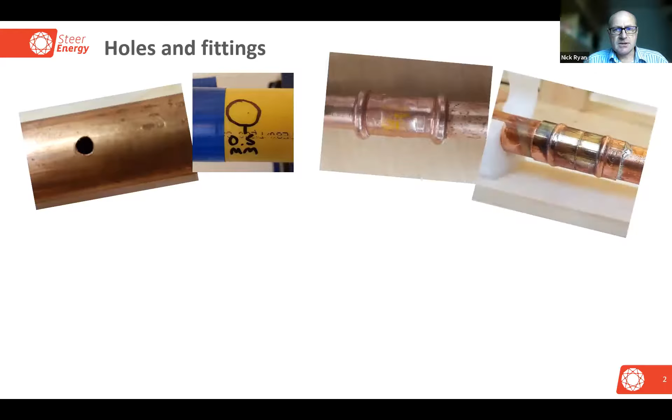These involved holes and leaking fittings. This fitting on the left is a crimp fitting that's not been done properly. We've done solder fittings that don't have any solder in them, and even legacy items such as this copper sweated into a lead joint, and things like compression fittings that have not been done up correctly.

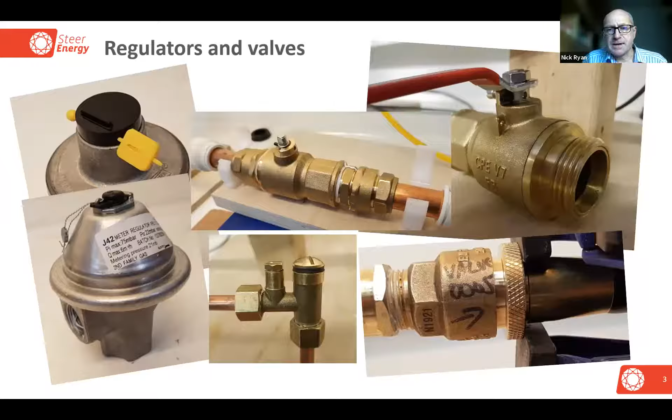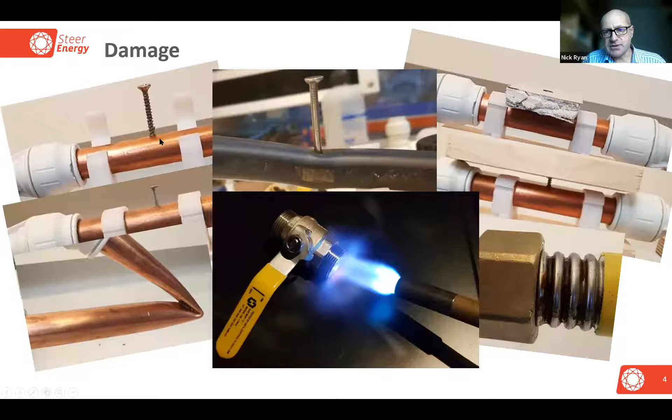So it's a very high level look at the results. What we found: a system that does not leak in methane will not leak in hydrogen. So when we say leaking, this is relative to the leak tightness tests carried out for the relevant standards—an appreciable or measurable leak using the standard equipment a gas fitter would have.

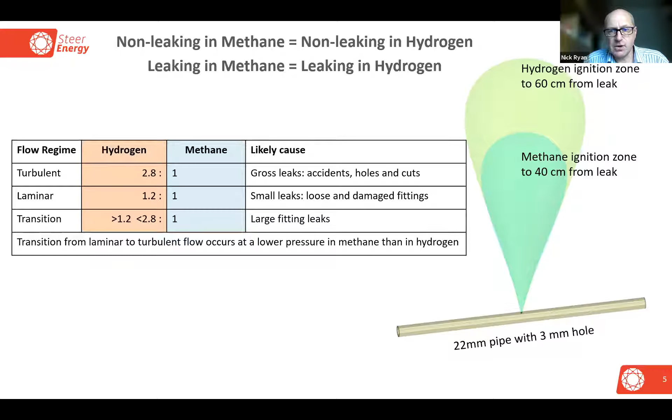So we looked a little deeper into why, because anecdotally at the start of the work we were told hydrogen's a very small molecule, that's what you'll hear people say, hydrogen's very leaky. Actually, the size of the hydrogen molecule, it's 2 hydrogen atoms, 2 angstroms essentially, well 1.8. The methane molecule, you've got a carbon atom with 4 hydrogen atoms, that's 3 angstrom side length. So they are essentially the same order of magnitude of size, and there's no reason to expect that one would leak more than another.

Also the size of leaks, the smallest leak you'll measure using conventional leak testing equipment is about 0.1 millimeter, that's 10 to the minus 4 meters. These molecules are 10 to the minus 10, so we're talking 100,000 to 300,000 molecules side by side to pass through that leak. So really, there's no molecular reason why we should see one leaking more than the other. It is essentially these bulk properties of density and viscosity that mean hydrogen will leak a little bit more.

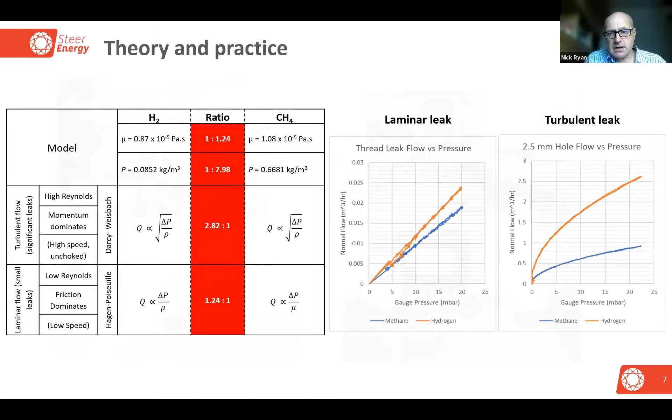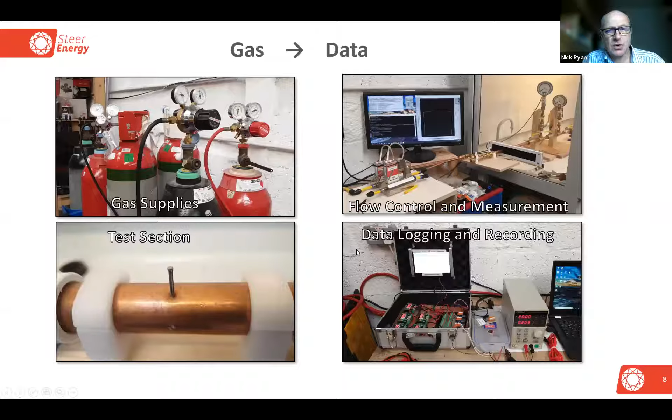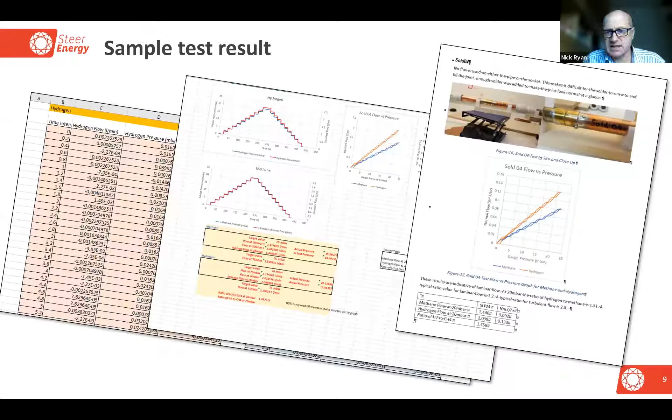For the sample, for each test, and again we were testing hundreds of different fittings and damaged sections, we'd step the pressure up and measure the pressure from flow. We do that in hydrogen, we do that in methane. For anything like a valve, we do not touch the system in between, so it is the same system, or close to the same system, that we're testing, bearing in mind there will be pressure variations in the atmosphere and temperature variation. Those are logged and addressed.

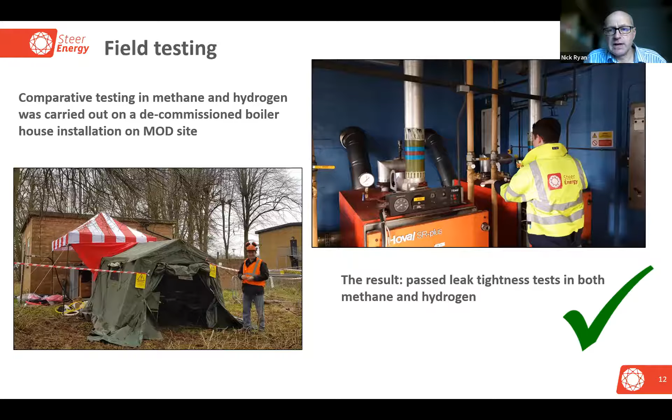But the other thing was it was incredibly difficult to test the same system twice, because to remove one gas and replace it with another, you had to break the system. We had to open up vent ports, we had to cycle valves to test whether the valves were passing. So you can never really test the same system twice, but essentially it was a good system in both gases, and would certainly have passed leak tests.

One other thing we looked at was a variation to look at purging - this is the process by which we commission a system. It starts off in air and you would then transfer into fuel gas. Now the density, these bulk properties of hydrogen - the fear is that hydrogen will stratify in a pipe, which we did not see happening and have not seen happening yet. It would tend to rise to the top of a pipe.

But when we purge - now these purges have been carried out at much slower speeds than would be recommended in standards, because we're essentially trying to experiment to see where the purge system stops working. We start getting this situation where hydrogen will bypass or methane will bypass the air. And really, we did not see that happening.

In fact, if we look at this one, this is controlled by a 2mm nozzle here. The hydrogen in blue, the methane in orange with the tick marks. And what we actually see is the hydrogen actually purges better than methane.

Now part of that is the faster flow speed - as hydrogen starts to go through the system, this is being controlled by a purge nozzle, so we know that hydrogen will flow more freely out of the nozzle, out of the hole, so then the speed increases and we get a better purge like that. Also, I think the increased coefficient of diffusion helps as well - hydrogen wants to mix with the air more, so we don't get those pockets left behind. So that sort of summarizes where we got to.

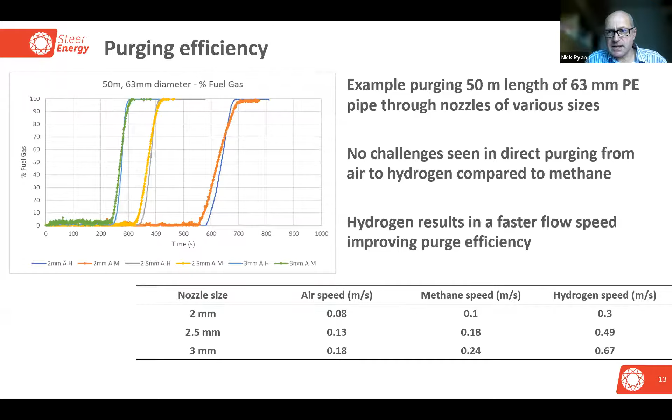I think it's probably worthwhile just going back to that summary of results slide there, which I know will lead on to some of the other work. And really, we did see more leakage in hydrogen, but it does follow the theory. You would expect 2.8 times the leakage in hydrogen compared to methane for larger leaks, and 1.2 times for smaller leaks. So there will be situations where a gas system is on the edge of passing a leak tightness test, and it just passes in methane but will not pass in hydrogen - it will fail in hydrogen. So if those same leak test criteria are used, the hydrogen systems will be more safe.

I would say, though, those sort of systems that are on the edge are likely to be detected through smell, because the odorization will detect really, really small leaks, as long as it's not in a well-ventilated area. And if it is in a well-ventilated area, then the risk is a lot lower as well.

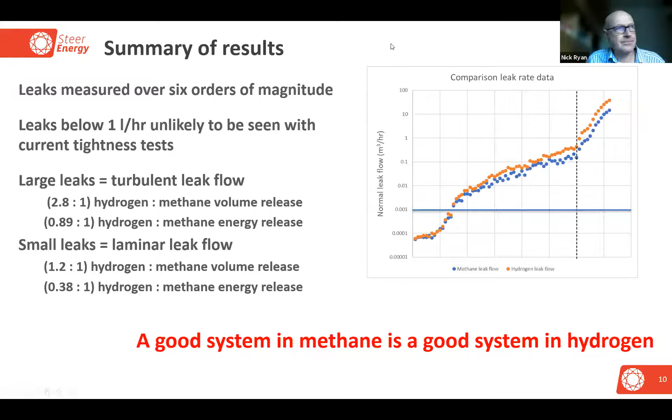Thanks, Nick. Very helpful. We're now going to move on from leaks in pipes in controlled circumstances to a more real-world view of what causes those leaks, how frequently they happen, and what scale they occur at. That's based on some real data, so a nice comparison there. Over to Paul then.

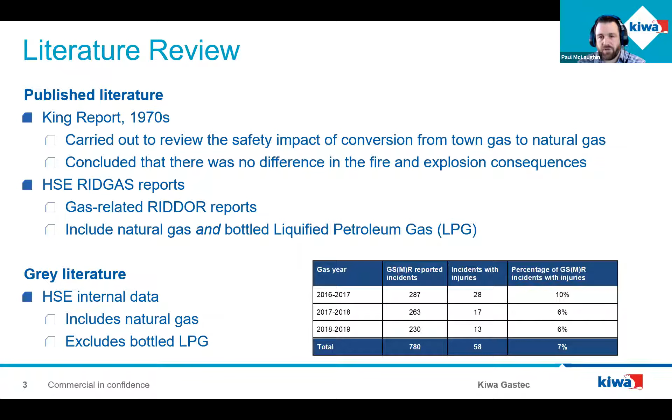So where are the knowledge gaps? What do we actually need to know to understand what's happening? First off, we need to have details of the RIDDOR events beyond the one-line summary of what's in there. As you can imagine, when people are responding to gas emergencies, their top priority is not filling out the description there, it's making the system safe and so on. So we need to try and get a bit more detail if possible.

And then also the question, what happens when there are gas escapes which don't cause a RIDDOR reportable event? So if you've got a leaking gas pipe that's got a sense that you can smell gas, but it's not building up to dangerous levels, then that's not going to be RIDDOR reportable, but obviously it is still an escape which is happening. So the scale and the magnitude of these things, again, is worth getting to understand here.

So there are about 24 million gas meters across the UK now. And from those 24 million, there's about 400,000 incidents and calls that people have to respond to per year, which is a large number in itself. But if you look at it there, essentially it's saying that about 1 in every 60 years per meter point, there's going to be an incident that's responded to.

And then from those 400,000 down to 260 is several orders of magnitude reduction. So the people do respond and investigate these incidents and make them safe in the vast majority of times. So it's understanding what is happening along those steps that's leading to the risk reduction.

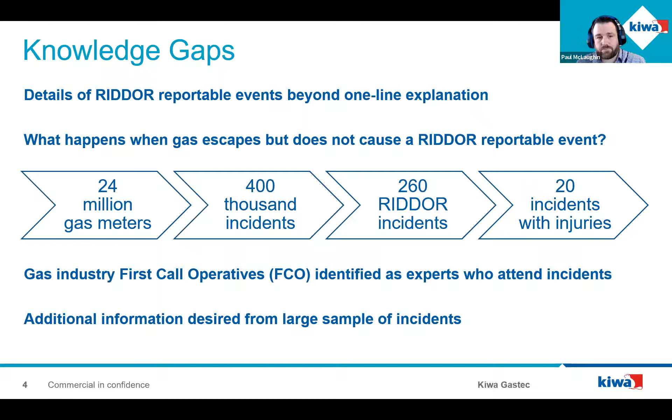This shows then how we sort of set out to look at it. So essentially 4 steps from designing the experiment of finding out what we wanted to have. So looking at a series of questions that we could ask the FCOs to respond to during an incident, which wasn't going to impact on their timeliness. And that's really an important factor there, is if we're going to ask people for data, it's got to be something they can answer simply.

It's got to be something that's in a black and white straight area if possible, rather than free text, because that's very difficult to process automatically. And then looking at the sample size. So we've set out ourselves that, obviously we'd have liked to get as many as possible, but we set a target of about 1,000 incidents that we wanted to have looked at as a minimum.

So we developed this. We developed an app that they could pretty easily use to fill the data in, so there was no data entry, transfer from paper, etc. This then was deployed, so the FCOs were trained in their depots to make sure that they knew what to do. They weren't asking people to go out and use the system they weren't familiar with and run the risk that they didn't know what to enter on it.

And started with one area before rolling out to 2 other locations, and importantly, rolling out across the country. So it wasn't just finding out about gas incidents within one particular geographic area, which might have some sort of local foible to it. So this was carried out over a period of a few months with regular updates, with a dashboard of results.

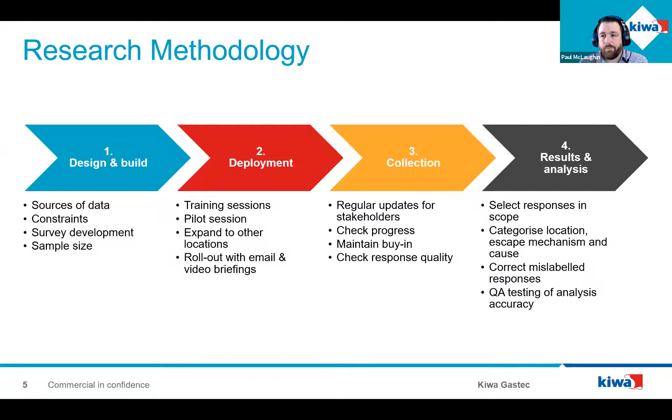So all of this essentially was there were 1,300 call outs. Of those, about 1,100 were gas escapes, and as we'll mention later on, of those gas escapes about 900 were within the scope of Hy4Heat, because again, reiterating the point mentioned before, this is looking at things after gas meters essentially.

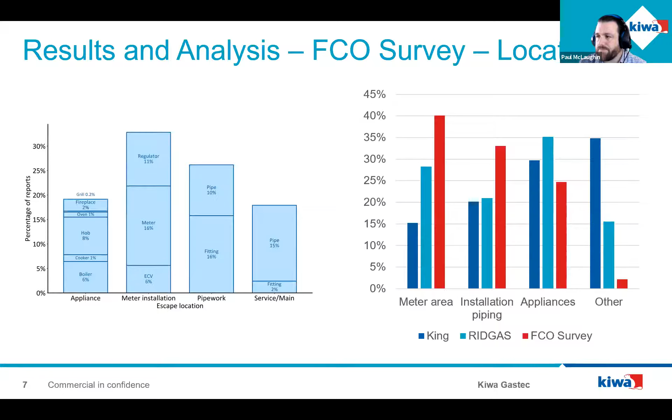What we did with this was we took these data points and attributed a leak rate that was consistent with the data which Steer Energy had carried out. So looking at a dry joint, what kind of leak rates you might expect to have from that, the holes that you would have in there, what the leak rates were. And in many cases, especially the larger holes, these match up just exactly as you'd expect from theory. There's nothing in there which is going to give you unusual fluid mechanical properties.

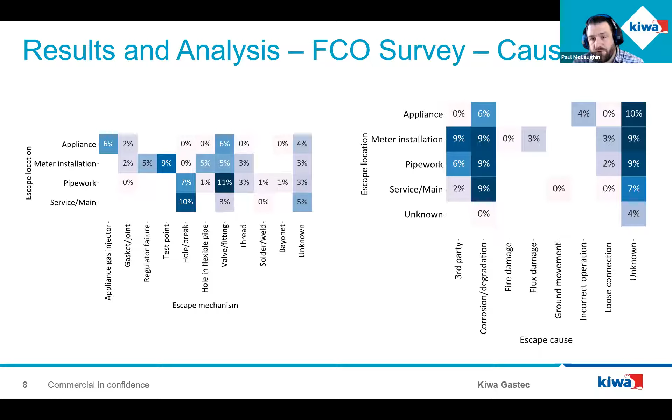Increasing rates. And of course, as we mentioned before, hydrogen is always going to have a higher release rate volumetrically than natural gas, with the larger difference at large rates where you're turbulent. But the energy release rate is lower or comparable with hydrogen compared to natural gas when you look at energy rates.

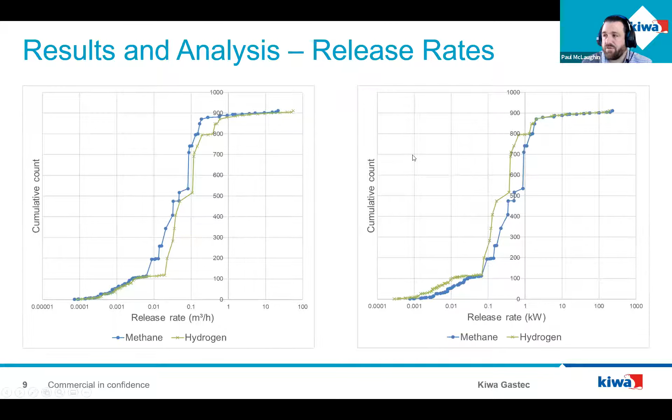So what do we actually conclude from this? Well, the conclusion is a set of S curves and data that we are able to use in building up the quantitative risk assessment, in terms of the types of, if there is a hole, what the release rate is going to be, and so on. The QRA is a section for discussion later on.

So of the 1,300 surveys we mentioned, about 900 were downstream of the emergency control valve, and thus in scope for Hy4Heat's work pack 7. Most escapes would have been below MPLR on natural gas, and some of them would have been above the MPLR on hydrogen. Although there's that difference, there's an increase there, because the MPLR is set at a low level, it wouldn't create a flammable atmosphere with either natural gas or hydrogen in those cases.

A small number of escapes, about 3% of them, would give rise to flammable atmospheres if you had either natural gas or hydrogen, and if you allowed them to continue indefinitely. That's the key as well, as when we're looking at this, is making sure that we understand what happens in terms of dispersion and times of response and so on.

Spontaneous large escapes are extremely uncommon. Pipes don't just disappear. Pipes don't suddenly develop a great big hole, certainly not with the temperatures, pressures and materials that we have in gas systems used today.

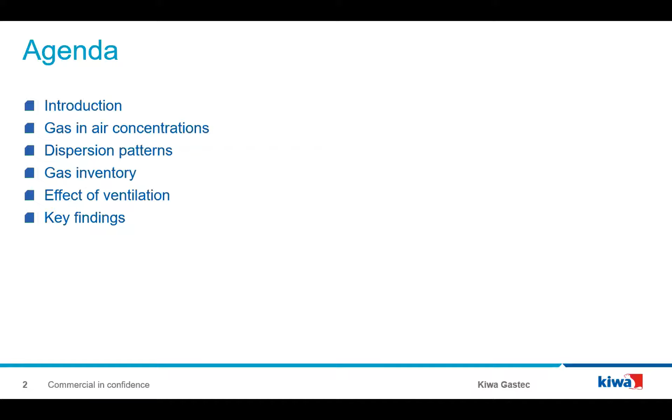I'm going to be looking at an overview of gas and air concentrations that are reached after a leak, the pattern of dispersion of both hydrogen and methane in a domestic setting, the gas inventory that you get after this, the effect of ventilation on these concentrations, and then a summary of the key findings of this work.

So the primary risk from any flammable gas ignition is an ignition of a gas and air mixture, and this applies to both hydrogen and methane. Studies have shown that the greatest risk of damaging deflagration tends to correlate with higher concentrations, and particularly near stoichiometric concentrations of both hydrogen and methane.

So if we are to understand the risk associated with using hydrogen in a domestic environment, it's important to understand how it actually moves around a property if it does leak, how high these concentrations may get, and most importantly how this compares to the situation we've got at the moment with natural gas, because we do have a flammable gas being piped into our homes.

I should just mention that this focuses on the dispersion of gas. It doesn't consider the consequences of ignition, and that is discussed later, in some of the presentations following later this morning.

The previous presentations have detailed that gas leaks are rare, and certainly the majority of gas escapes within a domestic setting are small. However, if you do get a larger gas escape, this can lead to a risk, and this is what we want to try and understand.

So data from several experimental studies have been looked at, including Hy4Heat and H100. We've used the data collected under these studies to understand the pattern of gas dispersion following a gas escape in a domestic environment, the impact of the escape location on dispersion patterns and the gas in air seen in that environment, potential areas of gas accumulation—this links potentially to meters mentioned earlier in terms of a leak from a meter in a cupboard—and the impact of ventilation on these, including house properties as well as additional ventilation within the space.

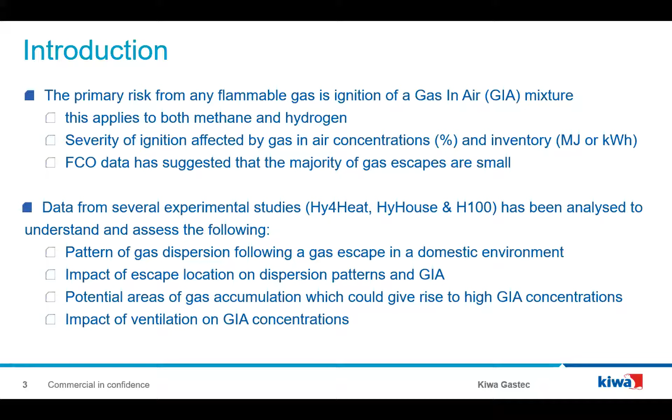So most of the experimental data was collected from two properties: the first collected by Kiwa under the HyHouse project, and the second collected by DNV GL under the Hy4Heat program. One is an old cottage, on the left-hand side, in Scotland, in a deserted area, built in the 1800s of solid stone, rendered. This was sealed up in terms of air tightness over the duration of the experiments to understand the impact of air permeability on the gas dispersion seen in that property, so we had a number of experiments repeated at different levels of air tightness.

The other property is a new build, built roughly in 2019. Both properties were fully unfurnished but finished, so they had second fix, but no furniture within them.

So gas was injected into these houses at known and controlled rates, dependent on the leak scenario being simulated. We were trying to simulate potentially common activities such as a leak in a fitting, a leak from a gas pipe, or maybe a DIY incident where you'd put a nail through a pipe or something like that.

But we also wanted to simulate larger leaks, such as perhaps a mains failure, so we had a wide range of leak rates into these properties.

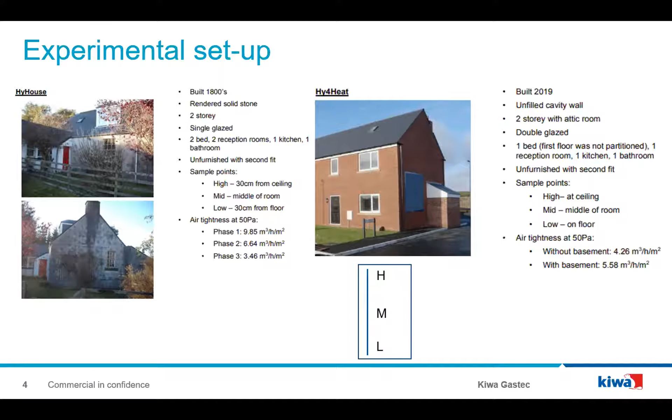In all instances, this maximum value was actually recorded at the ceiling, and we will touch on this a bit later on.

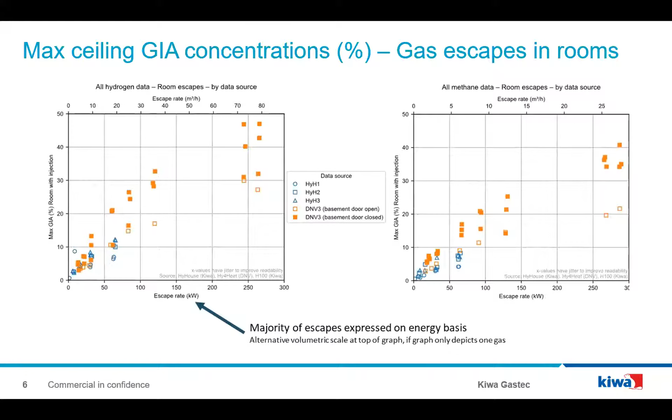So you can see HyHouse 1, 2, and 3 is basically changing air permeability of the property. As the property increases in air tightness, you tend to get slightly higher concentrations. Also looking at doors being opened or closed at the basement of the Hy4Heat project, that has an impact on the maximum concentration of gas you see within that space.

Now, I mentioned earlier that the maximum concentrations were seen at the top of the space, and so far we've only looked at the maximum concentrations measured in these experiments. One of the key findings was that when the gas was released at low pressure into a naturally ventilated space, both hydrogen and methane tend to stratify. This means you get the highest concentrations at the top of the room and comparably very low concentrations at low level. The height of gas release has a direct impact on this. The higher your leak, the higher concentration we tended to see at the top of the space.

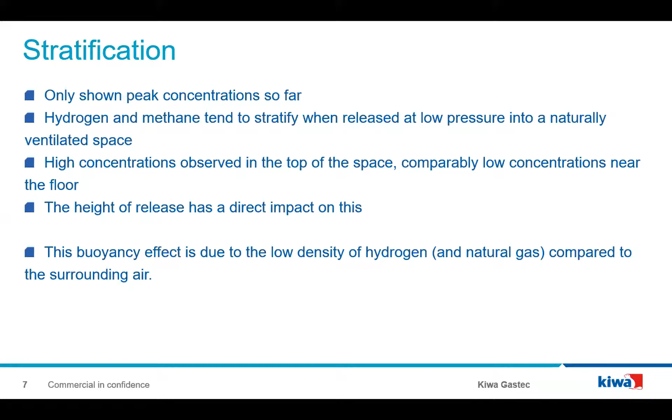This is all due to the buoyancy of the gas. Hydrogen is very light, so when released into air, it tends to rise. It will always rise to the highest space, and this creates a layering effect within a room. I've tried to demonstrate the stratification in these graphs.

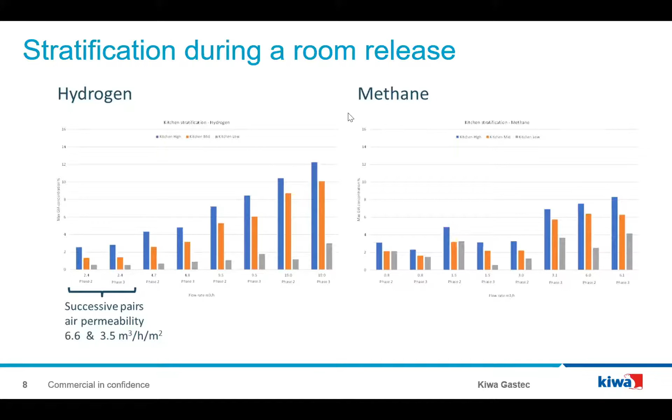So we're now moving on to look at gas inventory. This is part of the picture when considering the amount of energy and potential damage that could be caused in the event of an ignition. This will be talked about a bit more later, so I won't go into detail about that at the moment.

We used the maximum gas in air concentrations recorded in each test to work out the inventory in the properties. This was done on a whole property basis, but it can also be done for individual rooms and even taken down to individual cupboards, for example, to understand how much gas was in each enclosure we were measuring. In all of the test work we completed, methane actually resulted in higher gas inventories than hydrogen at the end of the test periods.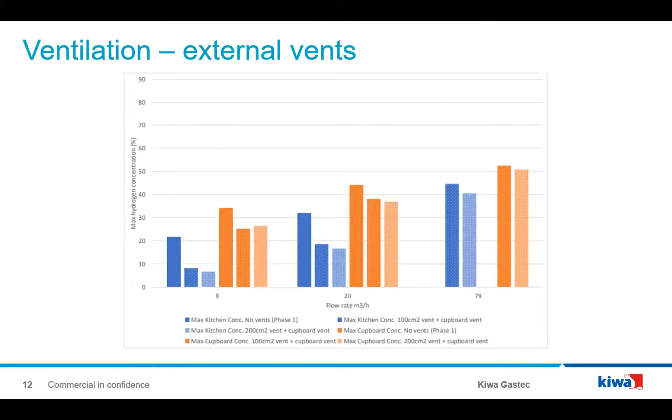So summarizing the key findings: fairly obviously, the higher release rate you get, the higher gas in air concentration you're likely to see within that space. You tend to get comparable maximum concentrations recorded for hydrogen and methane for the same energy release rate. The total house inventory at the end of the test period was lower when injecting hydrogen compared to methane. The height and location of gas has a marked effect on the maximum concentration observed in the space. Gas escapes in a cupboard can result in high concentrations, and basement releases can also result in high concentrations in inventory.

The air permeability of a property has a huge influence on the gas and air concentrations that you see, and adding to that, the effect of ventilation is strong - there is a strong effect of adding ventilation to a space in terms of taking gas concentrations down. And as mentioned by the two previous presenters, if you reduce the risk of increasing gas flow into a property, you can do that by adding an excess flow valve, which is an option for reducing risk, or the risk of large escapes occurring within a property.

From the presenters this morning, you've already heard about the likelihood of a leak occurring and the concentrations that build up when that happens. So I'd like to talk about - sorry, my slides have gone out of order a little bit - what actually happens should an ignition occur. The items we'll cover in the next 15 minutes or so: I'll give a little introduction to the work we did, explain the methodology, which was predominantly a literature review of existing data, extraction of data where we could, some processing, and then talk through some key findings, including isodamage curves, how consequence varied with concentration, obstruction and venting of the enclosure in which it took place.

As my colleague Georgina already said, the primary risk from any flammable gas is its ignition in air as a mixture, which applies to both methane and hydrogen. So we needed to understand the likelihood of a leak occurring, the type of concentration that would be achieved, and then see what would happen if those concentrations were ignited. That's what my presentation will deal with.

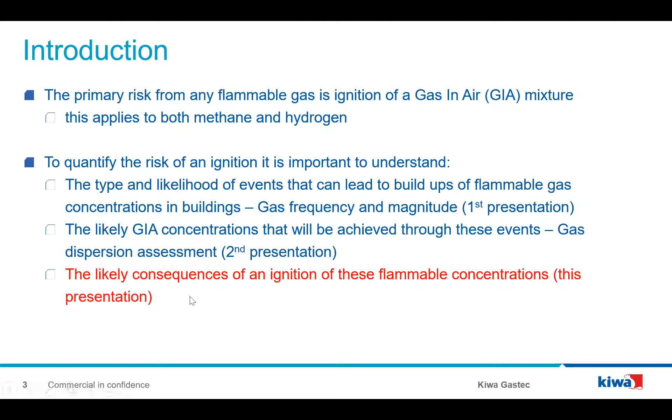So the first stage was to look at data that existed, and for obvious reasons, there's not a lot of data on real ignitions in domestic premises. So you have to look at what does exist. We looked at over 14 experimental studies that involved ignitions of gas within enclosures. These were from around the world: European studies, US studies, and Japanese studies, from a wide timeline from the early 1900s to present day.

We looked at academic reports, industry papers, from contacts we had, and various experimental studies. Each piece of paper or report was thoroughly reviewed. We summarized the findings, and assessed each one in its context and relevance to a domestic situation.

We extracted key data from each report and looked in detail at the context and the setup in which the experiment was carried out. What was it trying to achieve? We looked at the findings of the work and observations, and we paid particular attention to any evidence of detonation where it could be found.

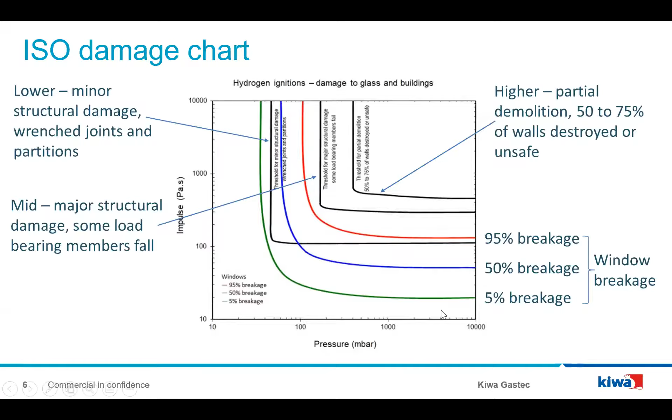We obviously had a lot of data, so we split the graphs down into concentration bands to allow ease of visualization, basically. And we chose bands that we thought - we had a feeling that initially hydrogen, from about 0 to 10%, would be less severe than methane in terms of consequence. There may be comparable damage from between 10 and 15%, and from 15% upwards, hydrogen is likely to be more severe. In which case, this is where we believe that preventative measures would have to be put into place to avoid these sort of concentrations.

It should be stressed that the sort of consequences that would arise from the above bands are very subjective. They're subjective to experimental conditions and may vary. So we plotted isodamage curves for each such band.

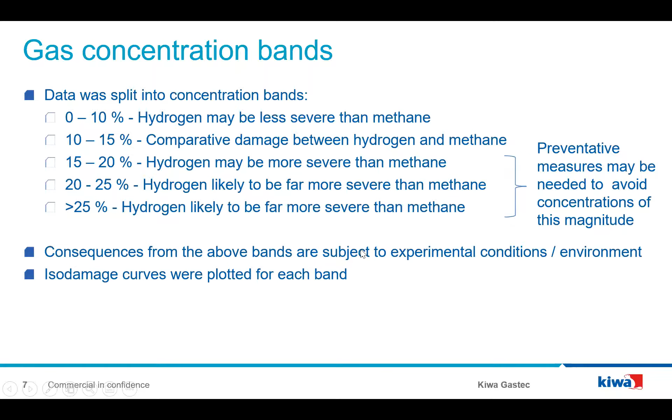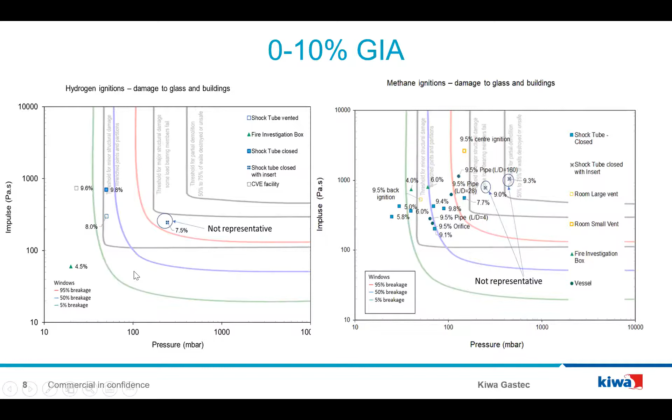Here's an example of the first band, which is a 0 to 10% gas in air concentration. You'll see that we have hydrogen results on the left and methane results on the right. After discussion and consideration of the experiments, this point on the right on the hydrogen graph was decided as not relevant or not representative of a domestic situation. It was a shock tube with a very specifically designed insert to accelerate the flame front. So you can see generally the hydrogen results tend to be towards the left of the graph, whereas the methane results are spread out a little further.

At 15 to 20% gas and air concentration, it's all hydrogen results. There were no methane results with which to compare. This could be that in the sort of experimental conditions that we were looking at, concentration above stoichiometric of methane just simply wouldn't ignite.

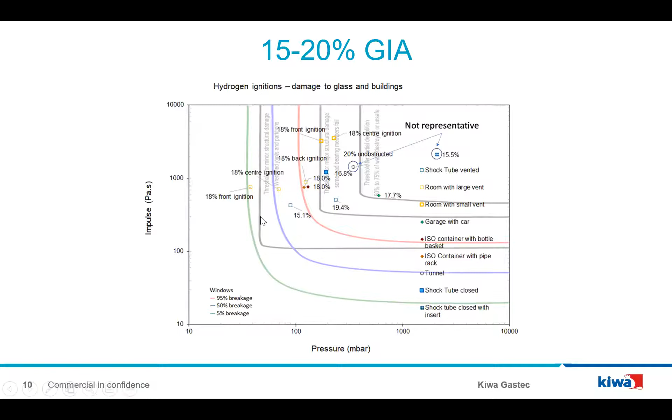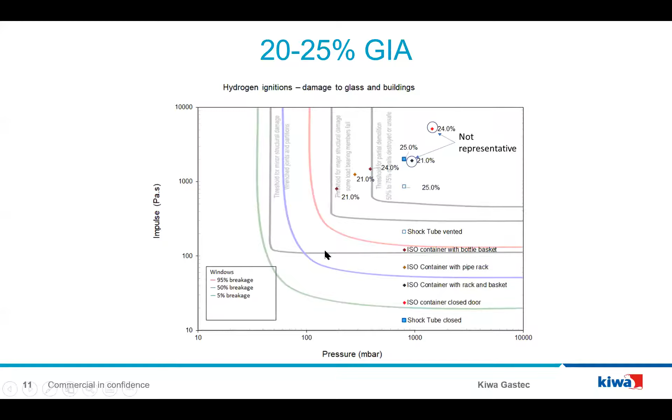So the same applies to the 20 to 25% gas and air concentration. You can see the hydrogen results are getting more severe, and they lie towards the higher end, the top right of the graph. And above 25%, there's potentially some significant damage.

So some of the key findings from the literature review were that we found some fundamental properties of hydrogen. It has a wider range of flammability than methane. The limits of hydrogen flammability do depend on the direction of propagation. It's roughly 4%, but only in an upwards direction, whereas at about 9%, it could be expected to propagate in all directions.

Methane has a lower flammability range from about 5 to 15%. Hydrogen has a potential or possibility that it can transition to detonation at roughly above 18%. Methane can, but it is a lot rarer.

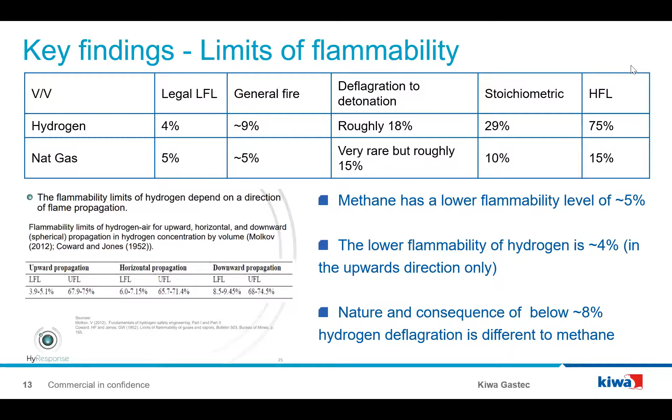Generally, as might be expected, the higher the concentration of flammable gas, the worse the consequence of an ignition. We saw that the methane severity was seen to peak at about stoichiometric concentration of 9.5%, and hydrogen tended to a maximum about 10 to 15 points below stoichiometric. We had limited data on ignition of hydrogen concentrations much above stoichiometric levels.

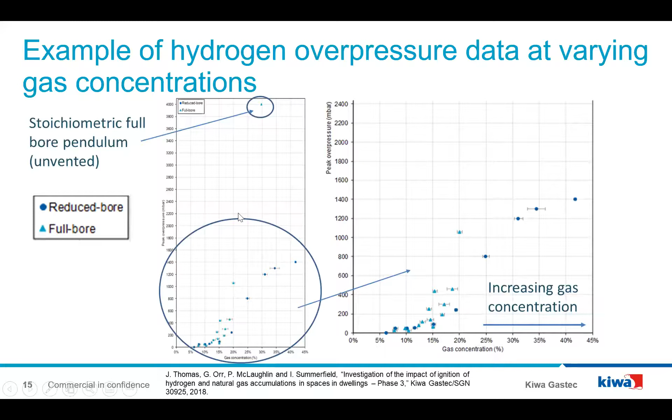This is an example of a graph showing increasing overpressure with gas concentration.

We also found that the room geometry had an impact on the severity of an ignition. As might be expected, fully enclosed structures result in the highest overpressures, tending towards adiabatic pressure rises. These were not considered relevant to a domestic situation, which is likely to have some form of blast relief, be it a window, a door, or other.

The environment in which the ignition occurs does have a big impact on the resulting consequence. This could be the shape of the room, whether there's any constrictions in it. Particularly the inclusion of any obstruction or items within the room can affect the severity of an ignition. This is particularly the case for very highly ordered obstruction, like the things you might find on a chemical plant.

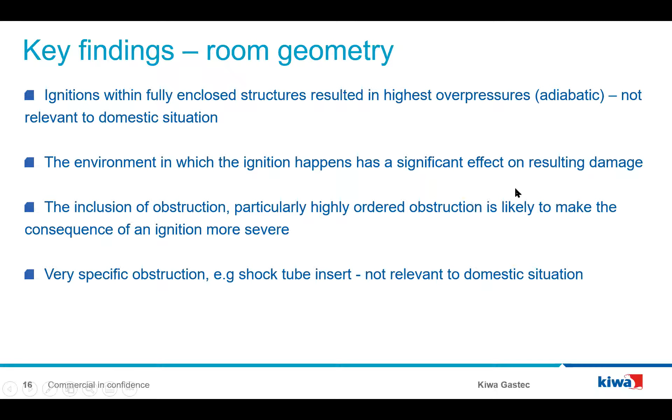And that was shown by the very specific shock tube insert tests. These weren't considered too relevant to a domestic situation, as this level of highly ordered clutter is unlikely to be found in such a situation.

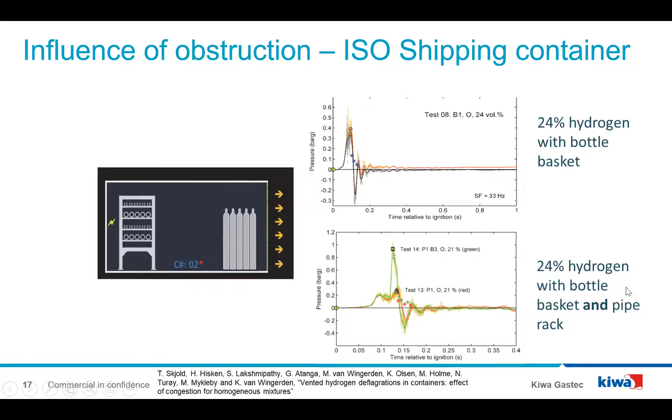This is a nice example of the pressure trace resulting from two tests done within the same ISO shipping container, which you can see diagrammatically on the left. There's a pipe rack and a bottle basket, so highly ordered, repetitive obstruction, and the trace on the top right is a result with just a bottle basket, and the one below it is with both, and there's a significant increase in peak pressure.

Blast venting was very important—this is an area or opening through which burnt gases and unburnt gases can escape after an ignition has occurred, and will reduce the maximum overpressure recorded. Generally, the larger the vent area, the lower the overpressure, and almost all domestic situations will have some form of something that will act as blast relief.

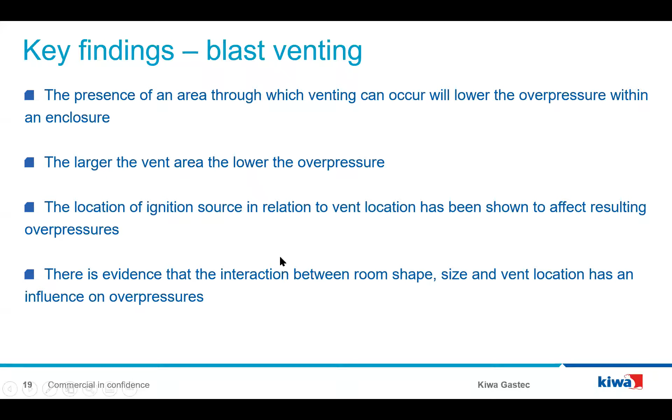There was also evidence that room shape, size, and vent location can have an influence on overpressure. There can be a complex relationship between the three.

This ISO damage result chart shows the influence of venting. The orange squares represent tests done in exactly the same room at exactly the same concentration of 18%, but the ones on the left have a large opening and the ones on the right have a small opening. So you can see it makes quite a big difference.

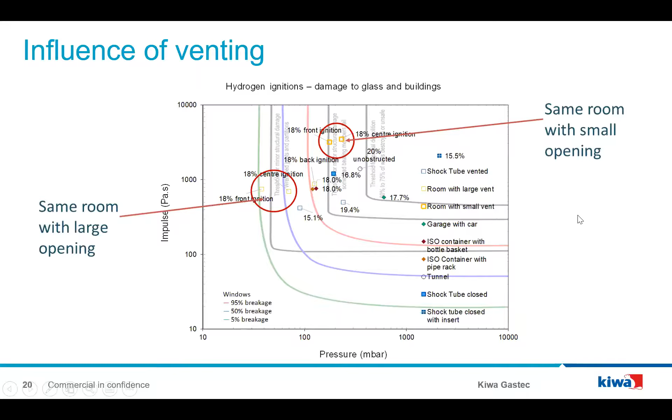We also looked at glass throw, and we put the results of our own testing onto some existing data to do with glass throw, and we continue to see an almost linear relationship between overpressure and distance that glass travels.

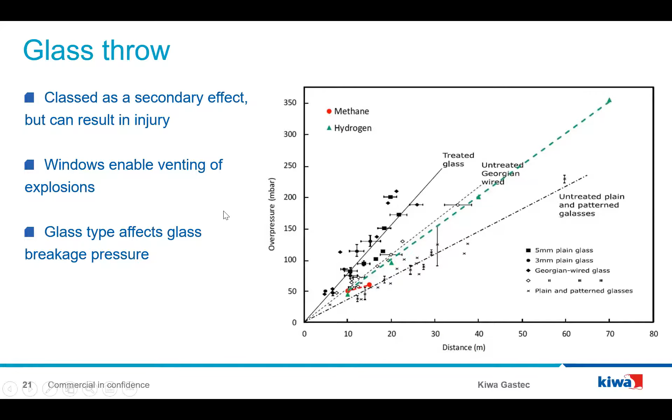Glass windows obviously also act as a form of blast venting, and they will fail. They have a failure pressure, so they tend to fail earlier on in a deflagration or an ignition.

As I mentioned before, detonation was something we looked at. It's very important. It's difficult to achieve in simple structures.

Of the experimental studies that we showed that had to do with hydrogen, we only showed evidence of complete DDT, that's deflagration to detonation transition, in one case, and that was only achieved with chemical explosives.

There was some suspected localized detonation in 3 of the reports, and these all involved some sort of enclosure within a room where a localized pocket of gas at a higher concentration than the surroundings was able to accumulate. Cupboards containing leaks, for example, are one such scenario that may be applicable in a domestic situation.

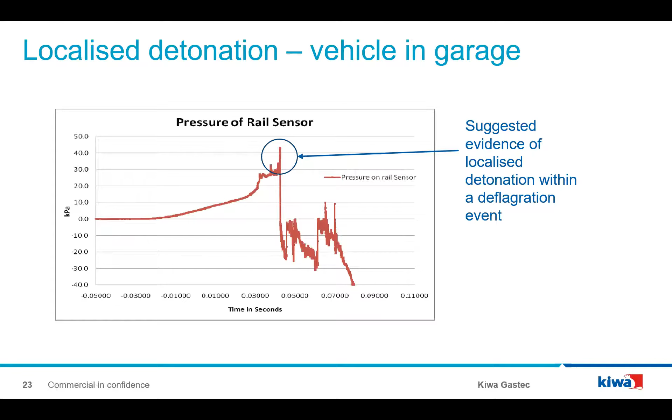Thank you very much. That completes my presentation.

Thanks, Nicol. That was a gallop through quite a lot of information there. It was, and you did really well to keep it to just over 15 minutes. So I won't waste any more time, we'll dive straight into Sam's presentation, so we've got time for the panel discussion. Sam's going to talk about modelling of the consequence.

Yep, certainly, thanks, let me just share my screen. So if I share this, let's see it. Can you see this here? Not yet, not yet, okay. How about now? That's much more promising. Okay, that's good, you've got standard PowerPoint view though, so if you wanted to go into the presentation and blow it up a bit. Okay, no pun intended. Yeah, okay, I think I'm now sharing the wrong screen. Hold on, let's bring that one over here. Okay, apologies, I didn't realize I was next in the queue. I'll share just quickly the... okay, there we go, this should be better. Okay, can you see this one? Okay, so yeah, I'm going to whistle through the...

Consequence modeling that I did, which is on the back of the work that Nicol and Georgina did as well. I'm going to go through the types of housing topology that we considered, some of the sequence of events that we considered, and some scenarios, a deep dive into dispersion and stratification, and then looking at the estimation of overpressure following a dispersion and an ignition event in a domestic setting, and then a quick look at some of the outcomes, and then I'll touch on some of the challenges that we had as a project.

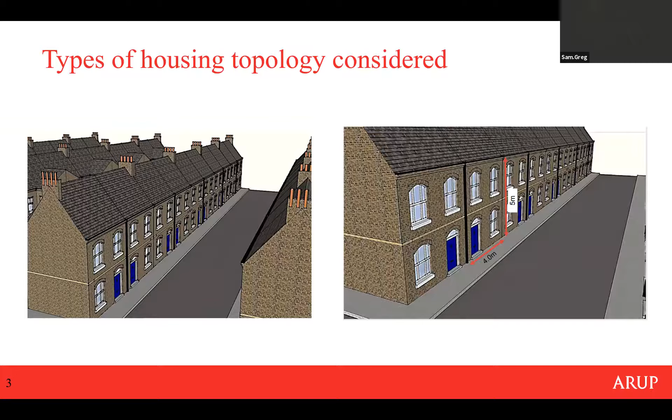With work pack 7, some of the type of housing topology that we considered was terraced housing, and this is because 30%, or 31%, of the housing in the UK is terraced housing. We took this housing topology primarily because a lot of it is subdivided up, and you also have the close proximity of party walls, so you share party walls with your neighbouring properties, and it also meant that we could extend the assessment more easily to detached housing and semi-detached housing.

So why is this? If we just look at these two examples here, the one on the left is the Salford Greater Manchester explosion in 2010, which is in a row of terraced housing. You can see that although the event occurred in only one property, it brings about structural collapse in both the neighbouring properties, and the neighbouring property but one suffered partial collapse.

If we compare this to, say, a detached property like the one on the right side here, which is the Haxby example, you can see that although there's catastrophic damage to the property or domestic setting where the initial dispersion ignition event occurs, the properties either side, apart from some of the glazing that's been damaged and some damage to the roof, it's still quite superficial, and the main structure is still standing.

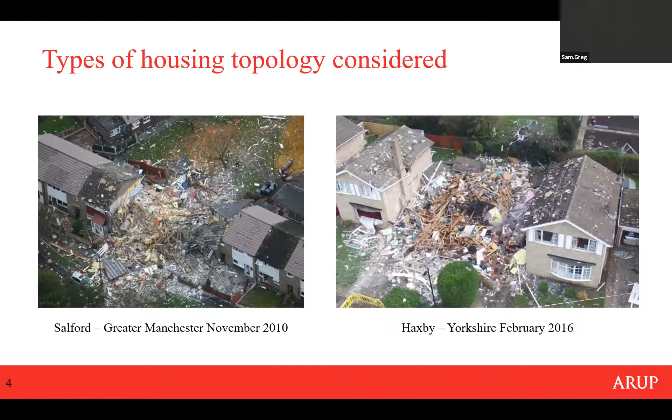The types of consequences considered in this part of the assessment: we've got our house where we have dispersion and then an ignition event occurring, and we looked at the impingement of occupants in a combusting methane or hydrogen cloud, and what that would cause in terms of the number of injuries that could occur externally in the urban realm or the street.

We looked at primary and tertiary injury. Primary injury is predominantly injury due to exposure to blast overpressure, and the threshold for primary injuries is actually very high — we're looking at eardrum rupture and lung hemorrhage, which certainly did not dominate the types of injuries we modelled. Tertiary injury is injury due to blunt trauma from falling over or being thrown into something. We also looked at projection of glazing.

That also represented the impact from debris following an ignition event in the home.

The main factor that dominated a large amount of the injury levels is structural collapse. You could argue this overlaps with tertiary and secondary injury, but we looked at it separately — this is where the structural integrity of a building is lost, and an occupant is either injured due to part of the structure falling on them or it collapsing around them.

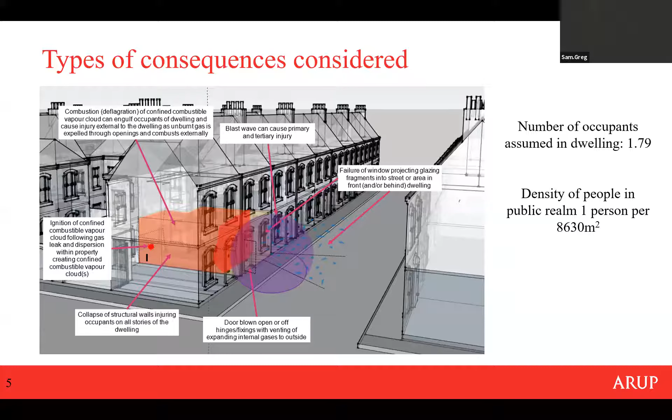We did the same thing for looking at the density of people in the public realm. So although this number comes up as somewhat random, it's based on a lot of assumptions, bearing in mind we're comparing hydrogen and methane — if we change these figures, it affects both methane and hydrogen by the same proportion. We also did sensitivity studies on this following comments from the HSE.

That combustible load quickly becomes the dominant source of energy fueling the fire, and therefore, whether it's methane or hydrogen that starts that initial fire in the property, for both of them the consequences are pretty much the same.

For this assessment, we considered two types of enclosures: a kitchen-size enclosure, representative of a kitchen in a terraced house that's not open plan, and a larger enclosure, meant to represent an open plan downstairs of a property.

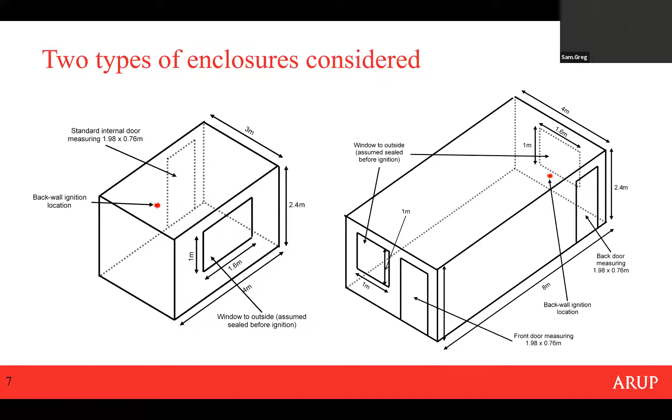The difference between these two is that a smaller enclosure has a smaller buildup of gas, so the volume is less, but the length of time it takes to reach a certain concentration will obviously be shorter than for a larger enclosure. We felt that this represented a good mix for a terraced house.

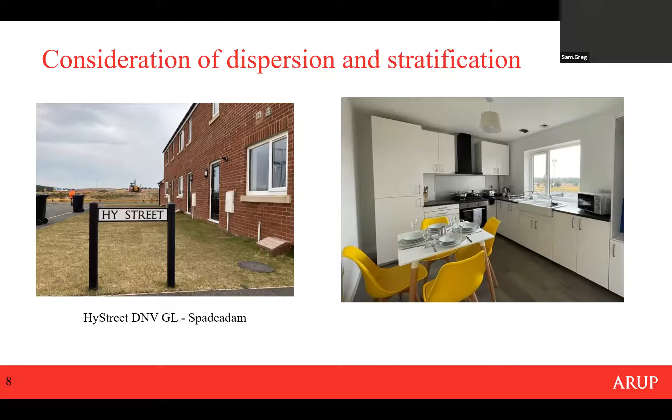When it came to considering dispersion and stratification — Georgina mentioned this earlier — there was a series of tests done at the DNV GL Spadeadam facility, where they had four different properties, and the outcomes from this experimental work fed into the consequence work I was leading, looking at how gas stratifies in a property, which Georgina has already covered.

Taking one example, which I think is on some of the slides Georgina showed earlier: what became apparent is that the concentration at mid-height and at ground or low level was often based on a percentage of the peak concentration at ceiling level, and this stayed fairly constant. So if we increase the peak concentration, which is always at ceiling level, the concentration at mid-height and ground level stayed very similar in relation to the peak concentration. This was the case for both hydrogen and methane for a particular leak scenario.

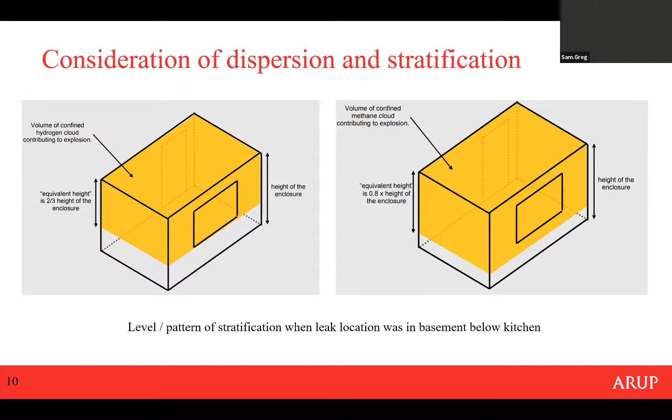So this example is when the leak is located in the basement, which in our case led to the highest combustible load in our kitchen or downstairs enclosure, because you have an area leak from the floor. For the consequence modeling, those of you who've looked at vented explosion models before know it's very difficult to model a stratified confined gas layer with variation in concentration. So we came up with this equivalent height methodology, which retained the combustible load but came up with an equivalent volume of gas at the peak concentration of methane or hydrogen in the enclosure. We did sensitivity studies on this, and it was interesting that what dominates the explosion strength for methane or hydrogen is actually the concentration itself, rather than the way it stratifies.

So in terms of estimating overpressure, we looked at a vented combustible explosion model, whereby your enclosure fills with a flammable vapor cloud, you have an ignition source, and the flame front develops from that point. We used a model from Warwick Fire to look at this.

One of the things these empirical, semi-empirical models don't look at is the partial venting effect that occurs as your overpressure increases. It assumes your volume stays the same and that your enclosure walls, so your kitchen or downstairs enclosure, remain in place to determine the peak overpressure. The reason we want to determine peak overpressure is because this feeds into determining the consequences in our assessment.

It was important to consider furniture and obstacles in a domestic setting, and a lot of thought went into this with some sensitivity studies. It's particularly difficult to determine the effect of obstacles such as furniture, but the semi-empirical method for determining overpressure from vented explosions, based on research from the Warwick Fire Group, uses the methodology that obstacles increase the flame surface area developing in a vented explosion, which increases the reaction rate and therefore increases the overpressure. There's a quantitative way to estimate this, albeit there's always got to be some caution when doing so.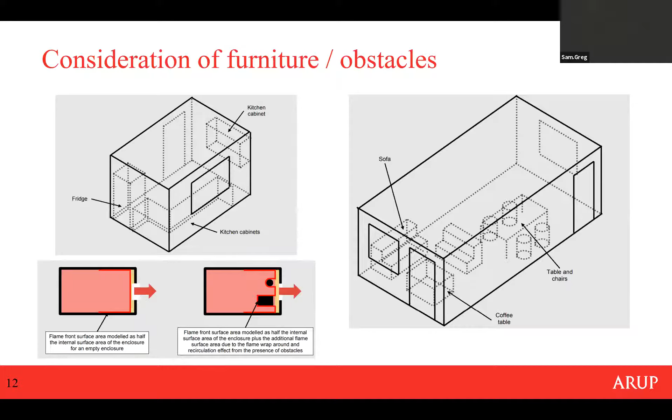But actually quantitatively estimating consequences is quite challenging, and the reason for this is because whilst we can have some binary way of determining structural collapse, for example, in a domestic setting masonry is brittle and doesn't yield any ductility, so it's either supporting something or it's not supporting anything at all. There's no halfway house here like there is with steel or reinforced concrete.

So in our model, we assumed that any non-load bearing partitions or members in a property have no structural integrity whatsoever. Once you have loss of structural members in a house, so we're looking at party walls and solid brick walls, we assume we get collapse of that portion of the house. But actually, in practice, we know that non-structural members do provide some structural integrity, as shown by this example here, and getting this into the modelling is quite difficult.

But I suppose the outcome is that the modelling we did is somewhat conservative for both gases. So the outcomes of the consequence assessment are summarized in these two summary slides from the report that I picked out here, and there's a stepwise nature to these graphs.

We're looking at total number of injuries versus the peak concentration in our stratified enclosure, whether it's our kitchen or our open plan downstairs. You can see there's a stepwise nature in the total number of injuries, and this is because injuries due to structural collapse very much dominate the overall number. That's why when we get a step change, it represents the transition between zero structural collapse and collapse of two party walls, and then assuming that anything those party walls are supporting also collapses as well. Then you can see for methane in this graph that it decreases as we get towards the upper flammability limit of methane.

This is very conservative, and we took this decision because once you get above the upper flammability limit, you could argue that you don't get ignition. But we know in practice that injuries, when looking at natural gas, the number of injuries actually does increase. Given that this is a comparative assessment between hydrogen and methane, it's conservative to underestimate the consequences of natural gas or methane in relation to hydrogen.

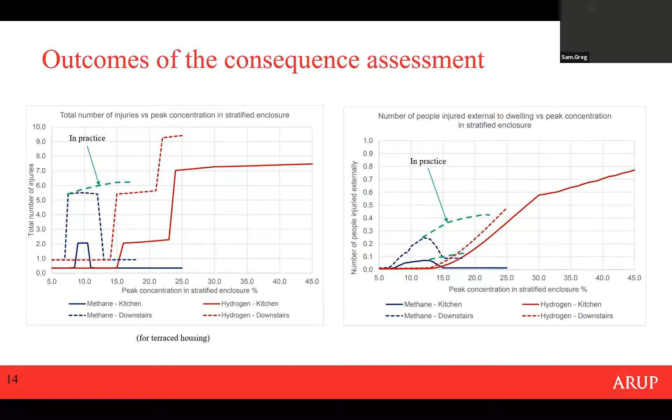Some of the challenges we experienced were, as I mentioned earlier, quantitatively measuring consequence and likelihood. The dispersion of methane and hydrogen in a domestic setting was also a challenge, because we found a large variety in how hydrogen and methane stratify. At the beginning of this project we assumed that the buoyancy or density difference between these two gases would dominate how they stratify in an enclosure, but actually it's very much down to where the leak is.

So if we have a leak in a boiler cupboard and it leaks out the top of the cupboard, in some scenarios you can get an almost identical stratification regime for both methane and hydrogen, i.e. a very high concentration at ceiling level and virtually nothing at mid and floor level for both gases.

This is something Nikhil mentioned earlier, that there's a distinct lack of experimental data, particularly for vented hydrogen explosions, which is understandable. It's very expensive to blow things up.

The models we used take into account all of this experimental data, but that doesn't necessarily mean it's enough. I think we highlighted in the work that we've based this on, as much as we have or as much as is available, but that doesn't mean more wouldn't be useful. There's also a lack of detailed knowledge of events leading to past incidents.

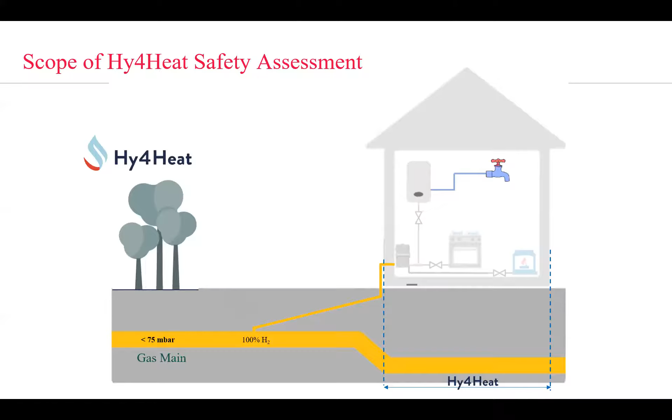So what was the objective? The objective was to conduct a generic safety assessment, looking at the risks inside of properties.

We were aiming to determine whether the risks of conveying hydrogen can be managed such that they're no greater than the accepted risk level associated with natural gas. There's a current risk level that the general public accept to gain the benefits of using gas. So what we're trying to determine is that the risks from hydrogen aren't any greater than that, rather than using an ALARP approach, for instance, where you may actually end up with an increase in risk inadvertently. And then also looking at providing recommendations and appropriate engagement with the HSE just to ensure that there was support and recognition of the assessment.

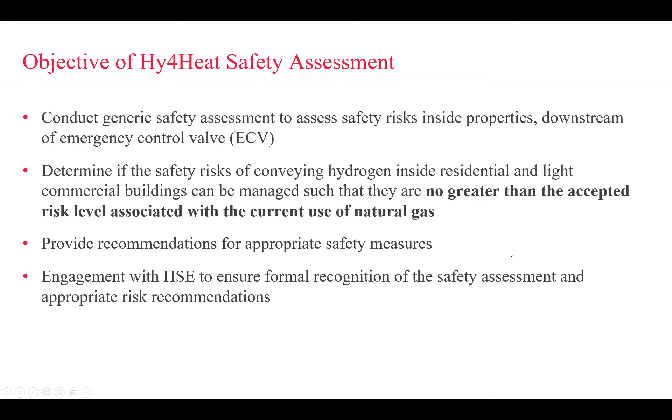The property types covered by the assessment include most typical residential properties, so terraced, semi-detached and detached, and smaller commercial properties up to 100 kilowatts gas usage, 2 stories, fed with maximum operating pressure of 75 millibar. What it doesn't include is industrial facilities, which are covered under different regulations, houses in multiple occupation, so blocks of flats, which would have their own challenges, and buildings with mechanical ventilation systems as well would be excluded.

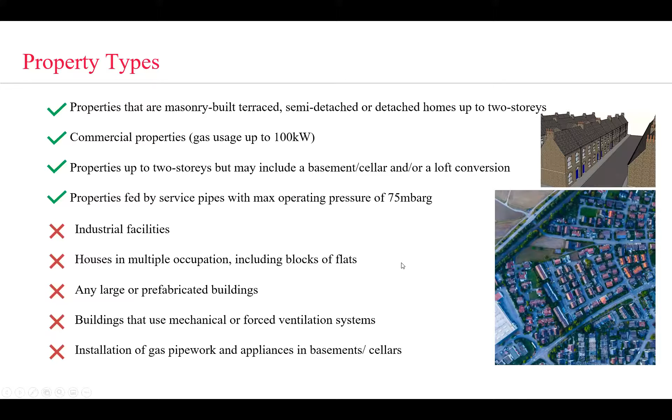So what was the overall approach that we took? This is illustrating all of the different inputs that went into the safety assessment. On the top there is all of the data that we looked at - this is what Paul was speaking about before. We used the data that we collected from the GDNOs in particular to feed into the assessment, alongside all of the experimental data that was collected as part of Hy4Heat as well.

You've heard about the leak testing that Steer Energy did, and also the dispersion testing done by DNV. What I don't think has been mentioned is the ignition testing that was also undertaken. DNV did a number of experiments looking at ignition probability with different typical domestic appliances, things like toasters, washing machines, irons, looking at the differences in terms of igniting methane air mixtures and hydrogen air mixtures, just to inform the ignition probability assessment within the QRA.

This middle bit here in the red box is the QRA part of the assessment. It's just stepping through - see the leak, the initiating leak, which Paul spoke about, through to the dispersion assessment, which you heard from Georgina, then the ignition and consequences, and then looking at what mitigation measures can we put in place to reduce that risk if we need to.

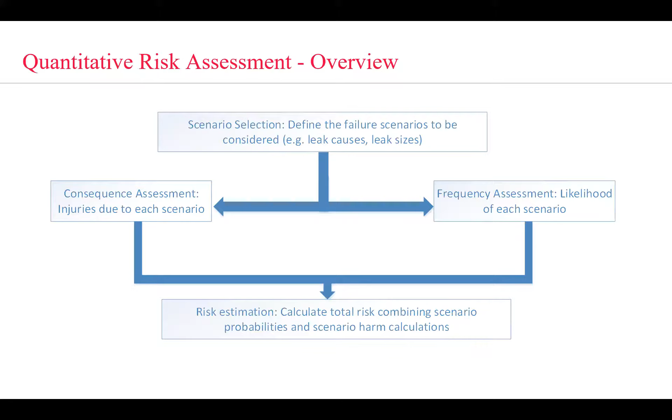Sam's already spoken about the consequence assessment side of stuff. So just quickly on the frequency assessment - the approach that we took was a combination of fault trees and event trees to come up with the probabilities for each of those scenarios. This is a diagrammatic version of what an event tree might look like.

You start off on the left with your leak frequency. This was the stuff that we got from the GDNO data collection, combined with the Steer Energy leak magnitude data.

Once you've got that, you look at detection and isolation - so do people smell the gas? And if they do, do they take appropriate action? Do they open their windows and doors to ventilate the space? If they know about the emergency control valve, do they close that off to stop the flow of gas, the leak? We looked at things to develop probability for that, like the GDNO data again, and the GSMR data as well.

And then you move on to looking at ignition and build up to flammable atmosphere. Do you get ignition at the source of the leak? That's quite unlikely, just given you would need to have a spark right at the location of the leak.

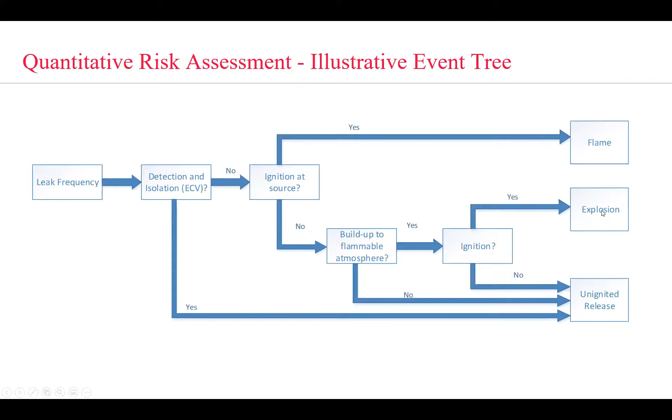So what was the outcome of the assessment? The outcome was that the risks were determined to be manageable, such that they're no greater than the current acceptable risk level, as long as you have appropriate safety measures in place. So we developed something called a safety annex that summarises these recommended safety measures.

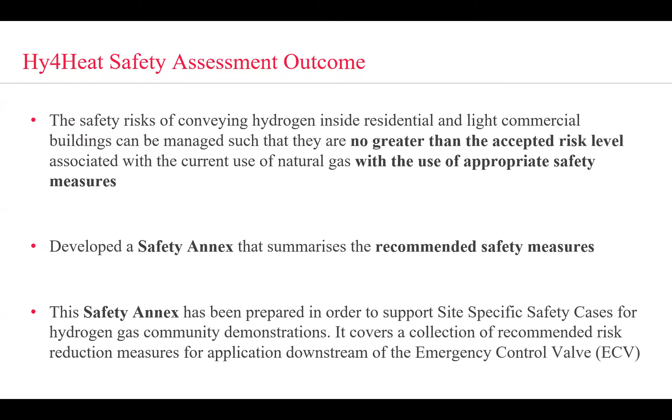The purpose of this annex is to support any site-specific safety cases that would have to be prepared by the GDNOs if they were to do any gas community trials. The annex covers a collection of recommended risk reduction measures, which can be applied across the board as a baseline for any community trial.

So what were some of those recommendations? The key one, which I think we've already heard about, is excess flow valves. The idea is to install two of these in order to limit the maximum flow rate: a mechanical excess flow valve upstream of the meter point, and the new hydrogen gas meter would contain an integrated excess flow valve as well, to increase reliability. So what you're really looking to do is limit the consequence of a really large leak into the property.

The next one is that all appliances and meters must be new. This ensures that they're appropriate for use with hydrogen and also brings them up to current standards. For instance, appliances would have to have a flame failure device installed, which would stop things like leaks from hobs or gas cookers being left on.

Hydrogen gas meters should also be installed outside of the property where possible. It's important to note we're looking at recommendations for community trials at the moment, so if there are situations where the meter can't be installed outside for logistical reasons, you would just need to do an appropriate risk assessment for the purpose of a trial. I think that would be possible in those properties where it can't be installed outside for whatever reason. And then the next one is sufficient ventilation in rooms containing gas appliances or substantial pipework.

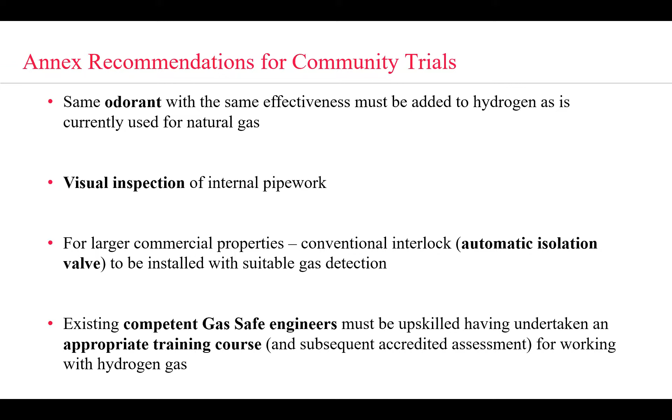The next couple of recommendations are that you would need the same odorant to be used with the same effectiveness as currently used for natural gas, to give familiarity and continuity with people knowing how to respond. Also having visual inspection of your pipework, and for larger commercial properties, the installation of an automatic isolation valve with suitable gas detection. That's where you're using more than about 20 meters cubed an hour, which won't be covered by your EFVs. And then obviously you need competent and trained engineers to do any change out.

And then just quickly to touch on the review we went through with the HSE: it was an intensive and robust process, involving a lot of presentations, discussions, reports backwards and forwards. I think this was really key to getting that support and recognition of the safety assessment and of the risk reduction measures that have been proposed, so we can be confident that they are appropriate and would be suitable for managing and reducing the risks of any community trial with hydrogen. So yeah, that's all I wanted to say really. I'll hand back to you, Phil.